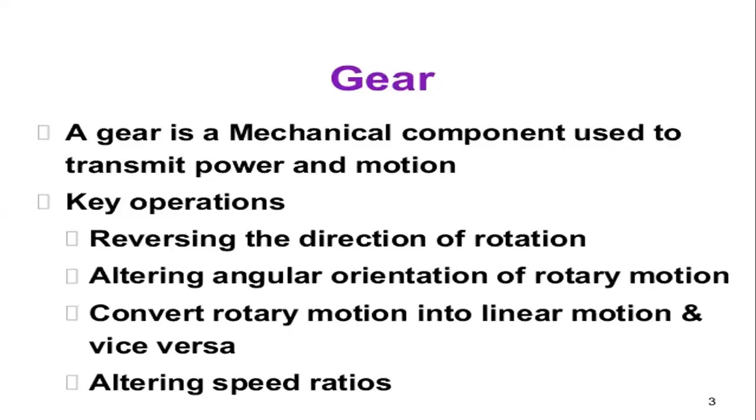First of all, we take up the measurement over rolls or balls. This is a very good and convenient method for measuring the thickness of the gear. In this method, two or three different sized rollers are used to check the vibrations at different places on the tooth, so by using these different rollers, we check the gear measurement at different places.

The first one is the measurement of concentricity. In setting of gears, the center in which the gear is mounted should be coincident with the center from which the gear is generated, that is, coincident to the generating scale as well as the mounted scale.

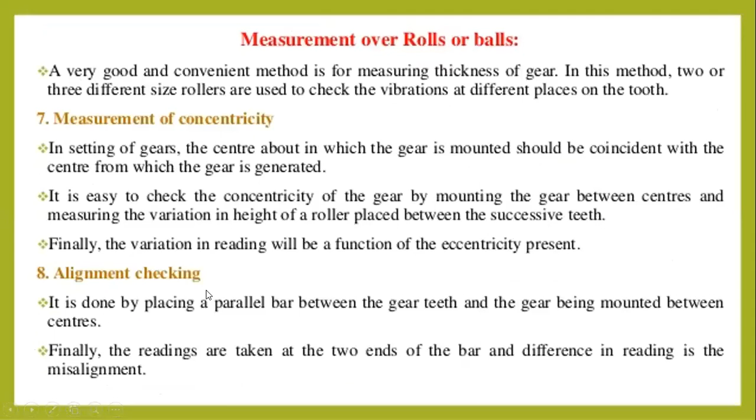These two spindles have to be adjusted so that the axial distance is equal, and the scale is attached to one side of the vernier, and the vernier to the other one.

This enables the center distance to be measured within 0.025 mm. That is the least count of the vernier calipers, which is 0.02 mm, but here it is obtained as 0.025 mm.

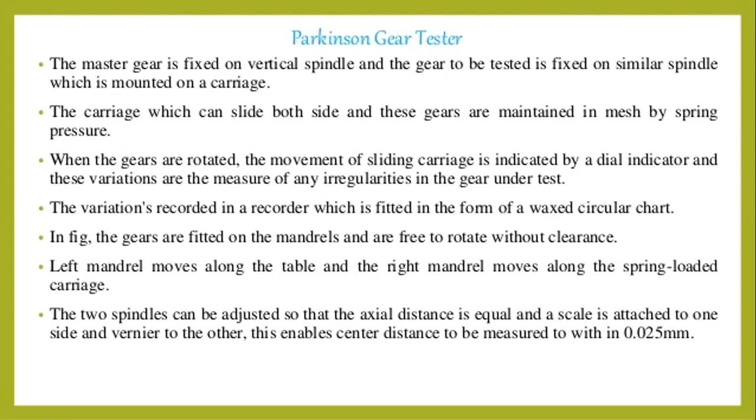Next, if errors occur in the gear tooth form, the gears will be in closer mesh, in which the pitch or concentricity of the pitch line will cause a variation at the center.

It occurs as a variation in the center distance from this movement of carriage. This movement of carriage is indicated by the dial indicator, in which the dial gauge will show the errors in the gear test.

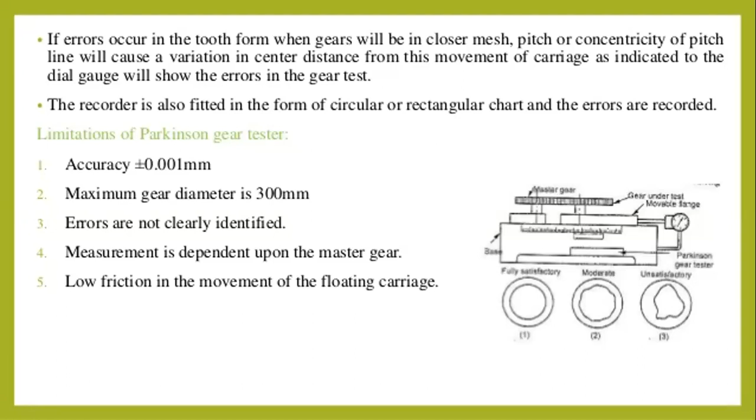Let's move to the principle of operation of this rolling gear tester. When you have to test it, you have to know the principle of how it is conducted.

When the master gear and the gear under test are in close mesh and rotated, any error will cause variation in the center distance, because using two different gears, or any other difference in the gear tooth, also results in variations. This results in errors occurring in the gears.

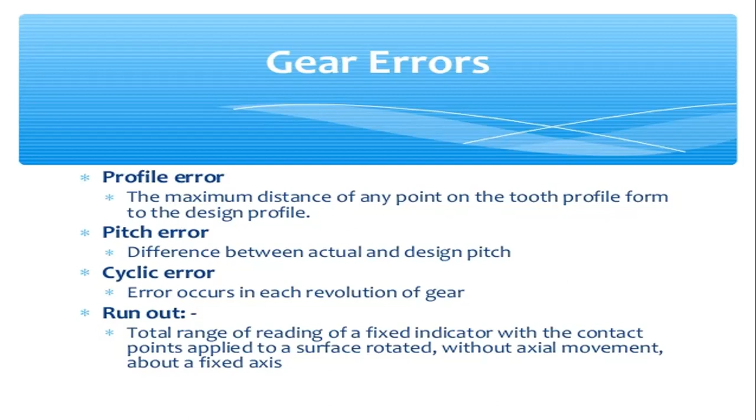Next is eccentricity, which is half of the radial runout, half of the amount of radial runout which does not have any fixed axis to its point. Next is wobble: the runout measured parallel to the axis of rotation at a specified distance from the axis is called wobble, which has a specified distance from its axis.

Next is radial runout: the runout measured perpendicular to the axis of rotation is called radial runout. This does not have a proper axis of rotation for its errors, and is measured along the perpendicular to the axis of rotation.

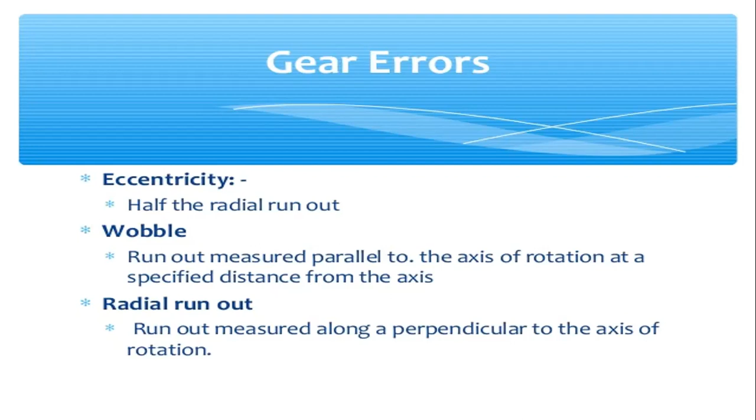Next is axial runout: this runout is parallel to the axis of rotation at a different speed, measured at a different speed of action.

Next is periodic error: the error occurring at regular intervals of time is called periodic error, occurring at regular intervals of time.

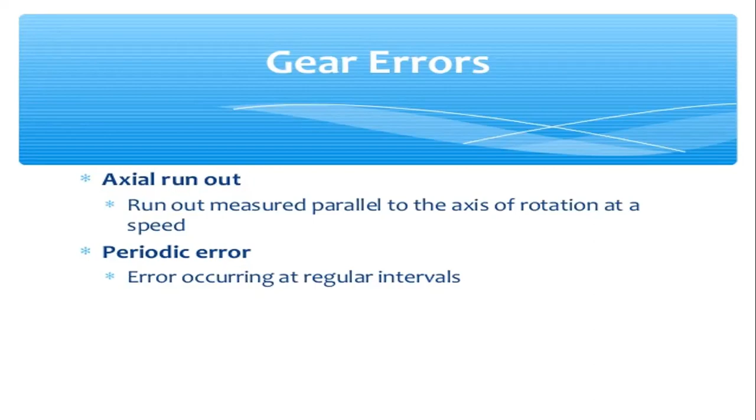These are the different types of gear errors. Generally the measurement of the gear is done by these measurements, and whenever there are variations left in the gear test measurements, these errors will generally occur.

Whenever you use the Parkinson's gear tester, the vernier tooth gear method, the base tangent method, or any other method, all these methods can have some type of errors occurring in the gear while meshing or while wear measurement. There is some wear in the gears, so they will occur some type of sound or vibration.